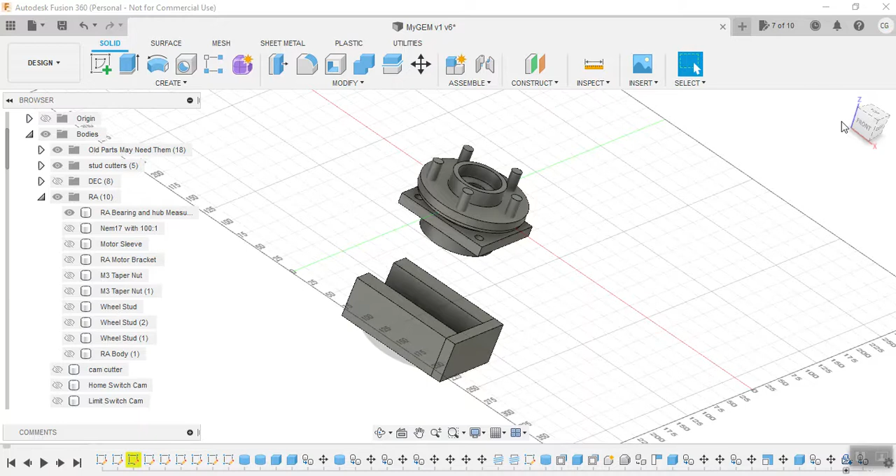Hello, I wanted to walk through the design that I've been working on. I had the first kind of teaser video out, and I thought I'd walk through some of the parts and the thinking I was going through.

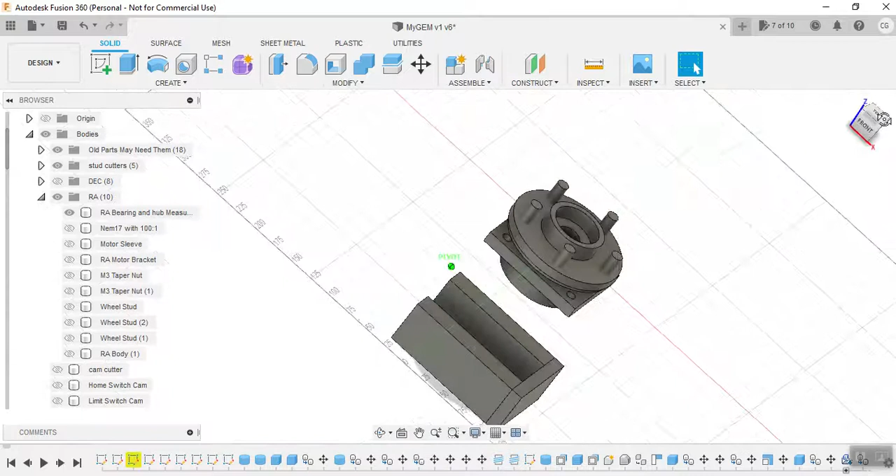This is the basic wheel hub. I listed the part number and the automobile that it went to, but it was nice because it had the wheel studs and it also had threaded holes in the back to mount threaded rods to. So on each axis or point of rotation, I had a mounting point. So this is it measured and just rough. I just made it out of shapes and such.

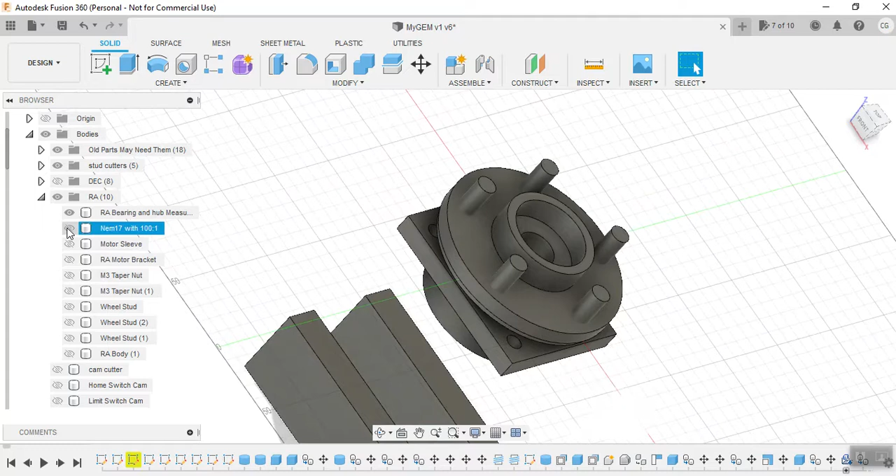So let's throw a stepper motor on it. I decided to go with a NEMA 17 with a 100-to-1 gearbox on it. I calculated the spacing from center to center, and I went with GT3 belts. I did not go with GT2. I thought GT3 was going to be much beefier, I guess. The teeth are much bigger, so I thought chances of this actually succeeding would increase by going with GT3.

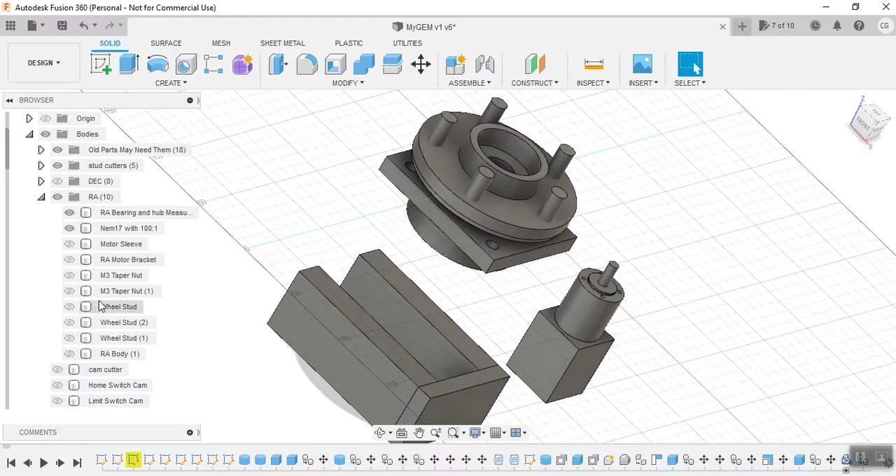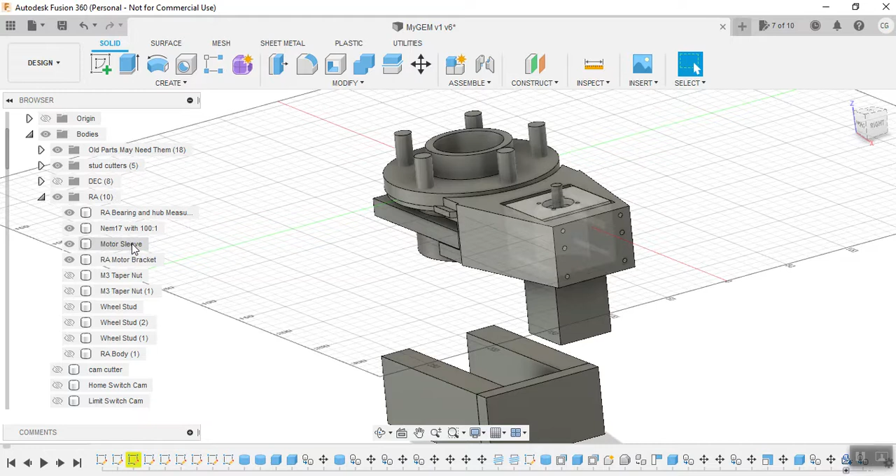Let's see. This is the actual bracket that I designed, and then the motor sleeve is what the motor goes into. So what this does, you'll see this motor sleeve is able to slide back and forth inside this void. I have M3 metal shafts running through it to keep it square, and then M3 bolts to move this, what I call motor sleeve, with the motor in it back and forth.

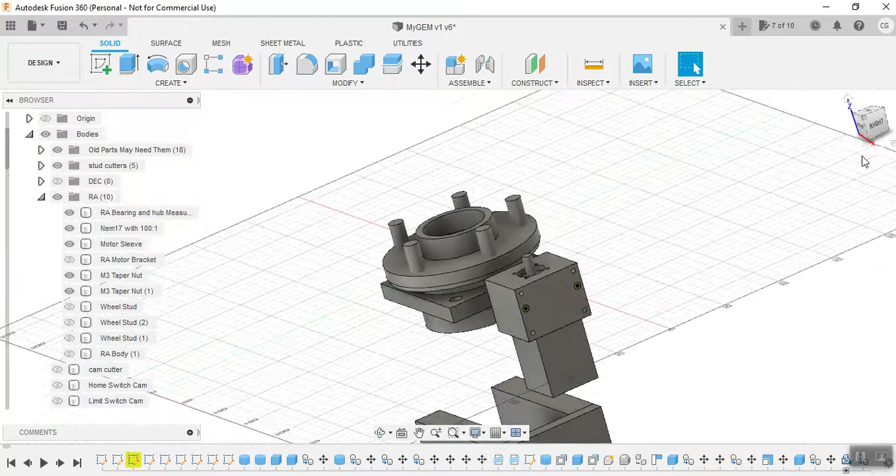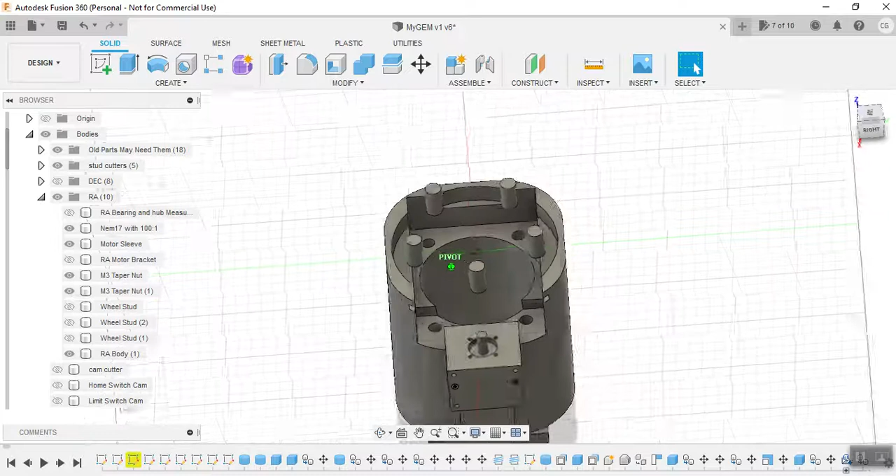Let's see if we turn off the bracket. I am using heat set threaded nuts that the M3 screws will go into, and then obviously the M3 rods, they just slide back and forth to keep things square. So let's go ahead and turn off the bracket. We'll turn on the body. I designed the body up and around the bearing. So you can see inside where I've left areas to where the bearing is going to fit in there.

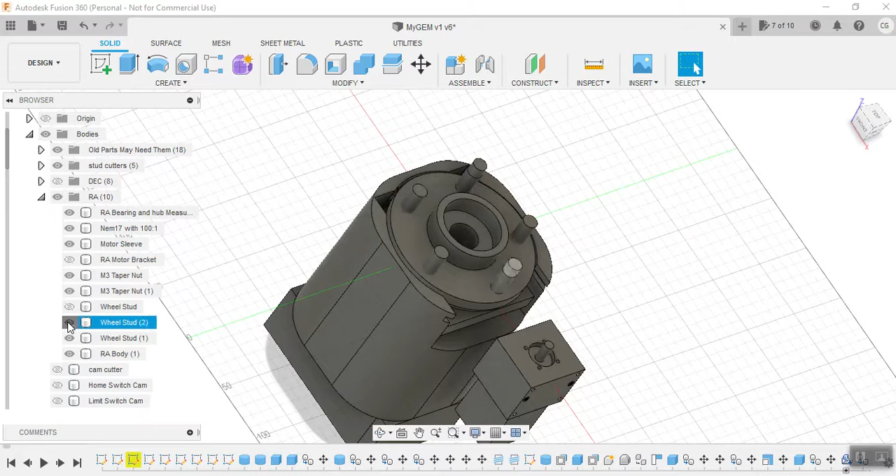Those are the wheel studs, and I'm just modeling around 3 of them for right now, or at least designing around 3. I probably will do all 5 wheel studs on this, which is what I consider the right ascension axis. So we can leave those on actually, why don't we? So this is the body that I designed out in Fusion 360. It will be 3D printed.

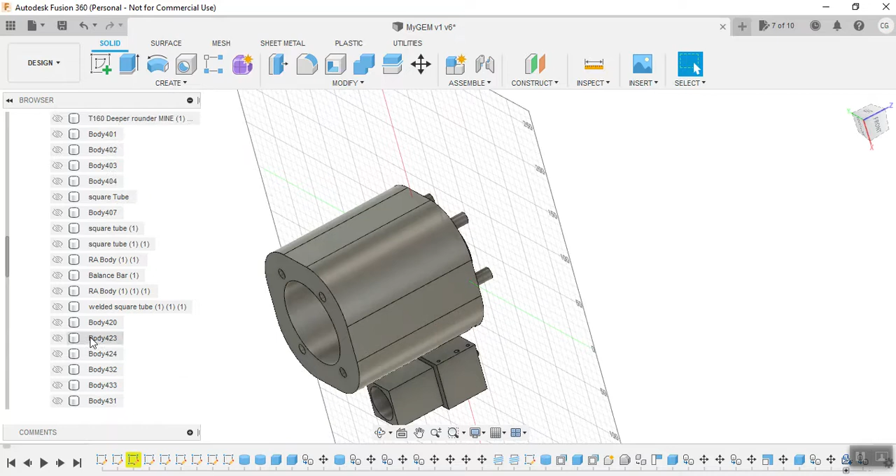And the threaded rods are going to come through the 3D printed body like this. So the threaded rods go up into, if we turn off the RA body, up into the base of the bearing and come down. So we'll turn the RA body back on.

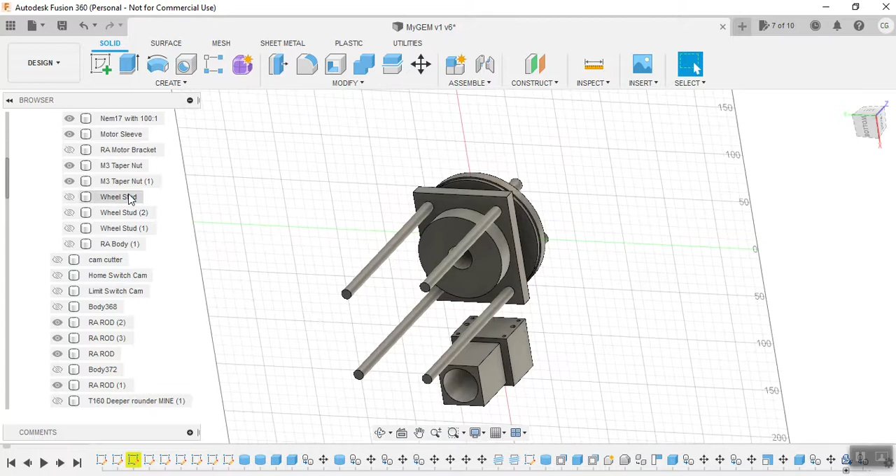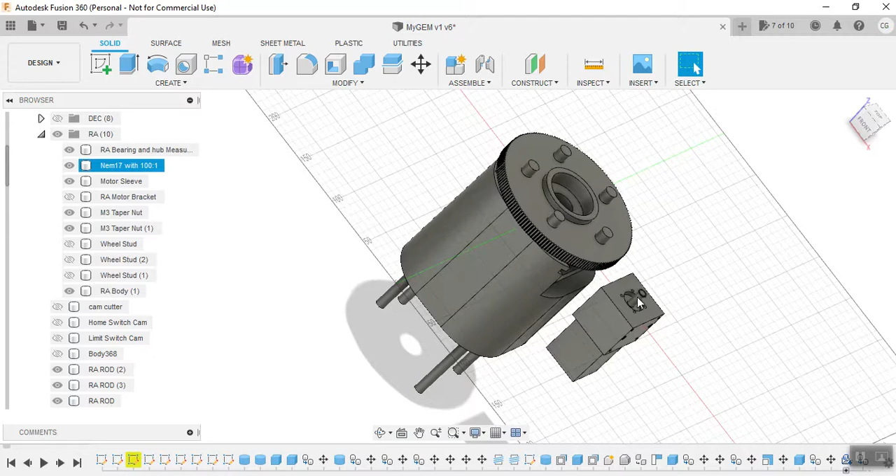Now here's where things get, well, let's go ahead and show gears. This is the GT3 gear that I designed that is 3D printed. And then I have a 16-tooth, I'm not sure if I have that in here or not. But anyways, there's a GT3 16-tooth gear that I purchased on the motor. So let's go ahead and turn the motor bracket on. So everything is turned on now as far as the right ascension axis.

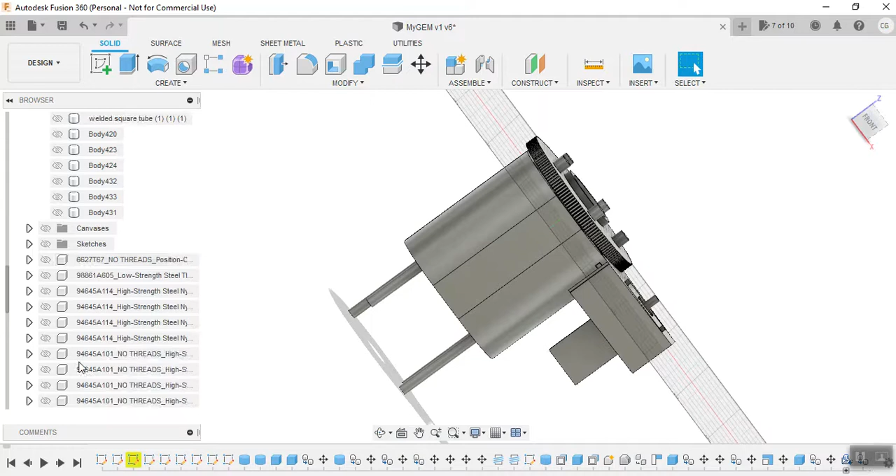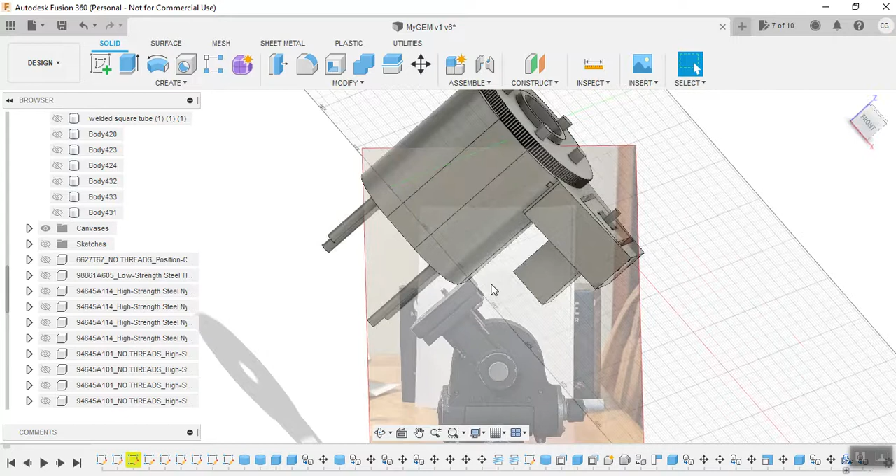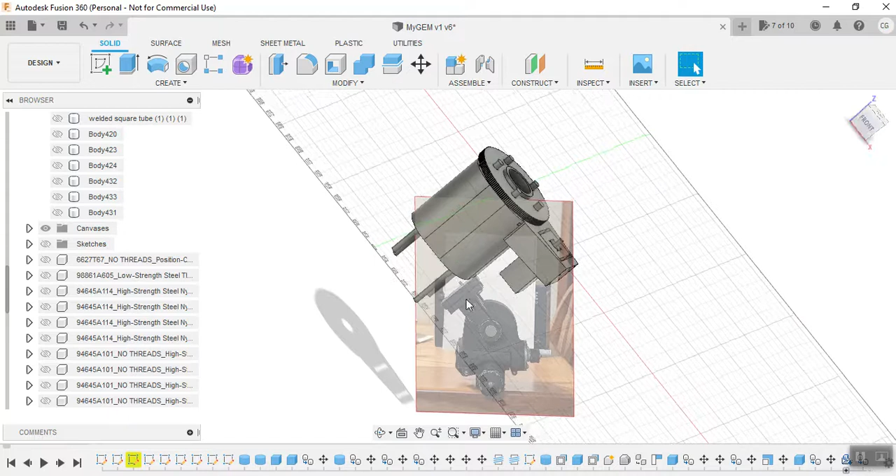Now here's what I found. You know, right ascension is going to be like this. So what I found was this majestic geared head used for photography, and it's pretty beefy. It's about the only thing I would trust, because right now the way I've weighed it, this whole assembly, once I'm done with this, when I show you the final video, is at 17 pounds. So the weight is starting to climb. And so having a heavy duty base for this telescope is going to be very, very important.

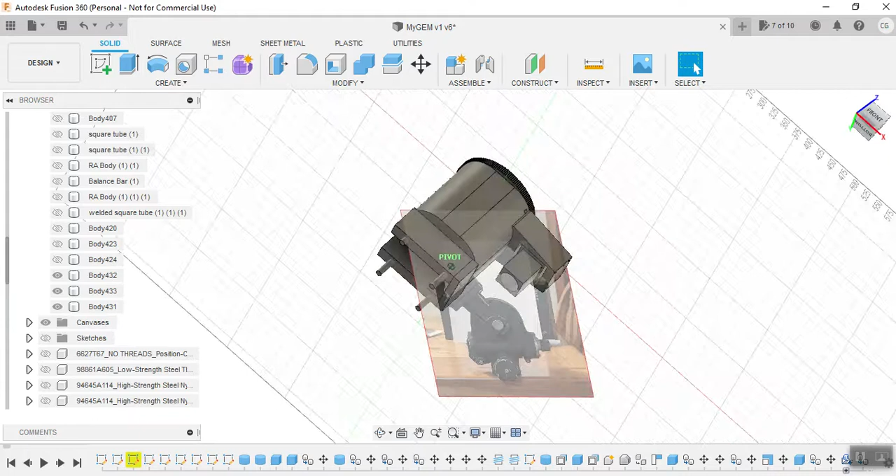So how do I attach it to this base? Well, what I decided is plastic 3D print is not going to cut it, so we need to throw some more metal at it. And so what I did is a bottom, a side, and this is modeled in approximately 1.5 inches by 1 inch mild steel square hollow tubing that I found.

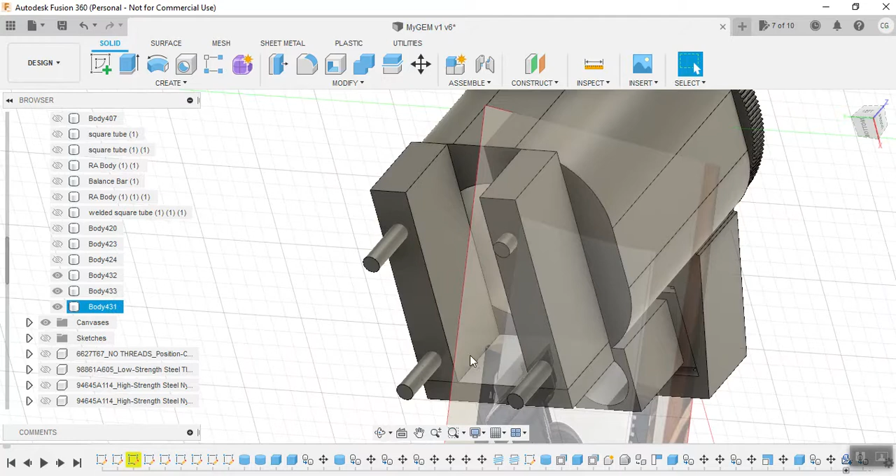So I bought some of that, and I have a welder, and I dabble a little bit. You will see I'm not very good at welding, but I can make metal stick together. I will be revamping some of this. Now, this is not what I actually designed.

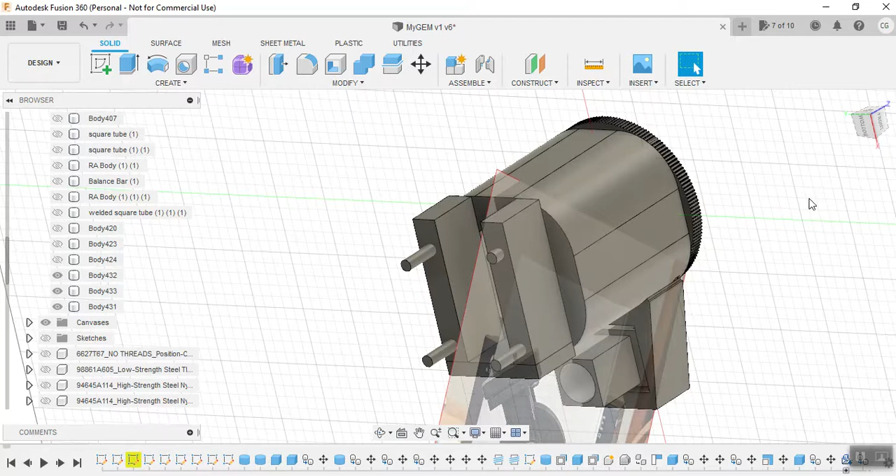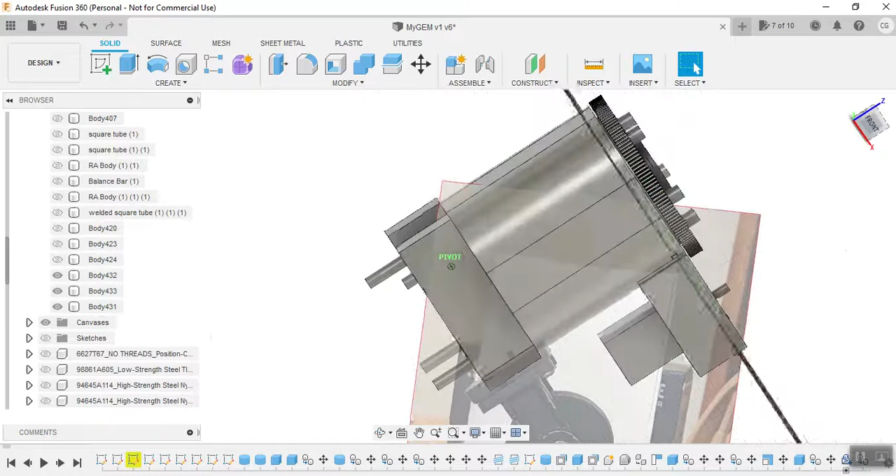Once I got a hold of the actual metal, it's hollow square tube with about 1/8 of an inch thickness of material. Once I got the actual steel in my hand, I decided I was going to go with 1 inch by 1 inch, 1/8 of an inch thickness square tubing. So in the video that I show of the final product, you'll see that's what this design evolved into. So I need to update my 3D model.

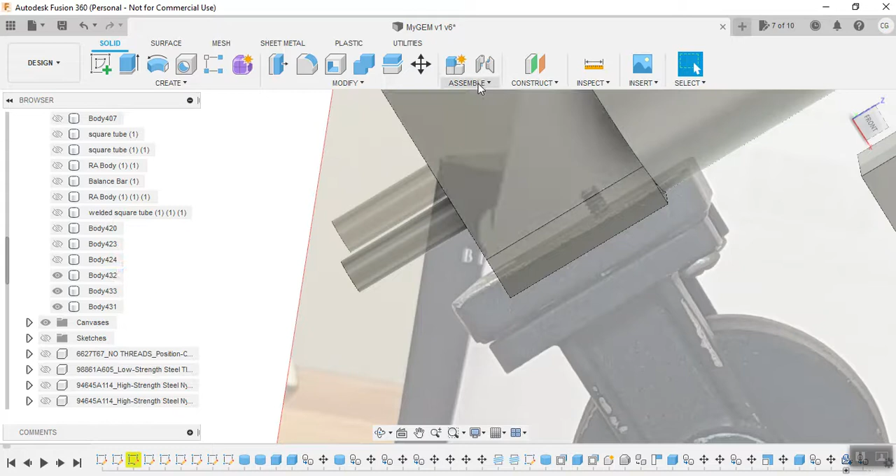So that was how I was going to attach. I made a plate that replaces this plate here on the tripod head, and I welded that plate to the 1 inch by 1 inch steel tubing. So that is how it is attaching to this tripod head. And obviously on this threaded rod we're using nuts and lock washers. Okay, so

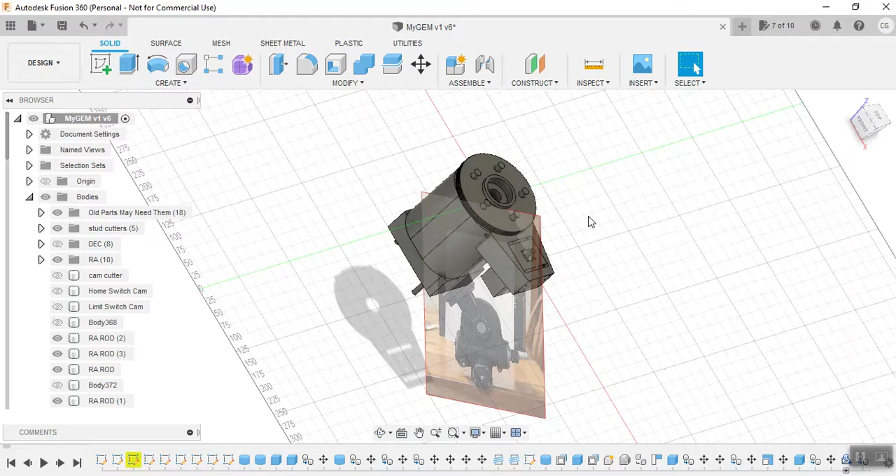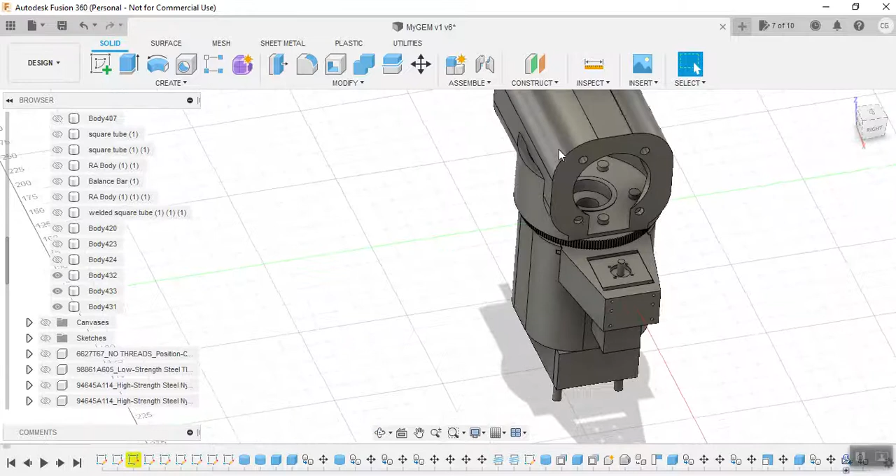I will show real quick Declination, and this is super rough. Declination, I just modeled it out. Right now, right ascension, I'm pretty happy with what I have so far. So Declination, let's turn off, it kind of gets in the way, we'll turn off that tripod head. You can see what I kind of did is I started with a cylinder to attach to, or fasten to, the wheel bearing. And then I copied up some of the same bodies from right ascension up to Declination.

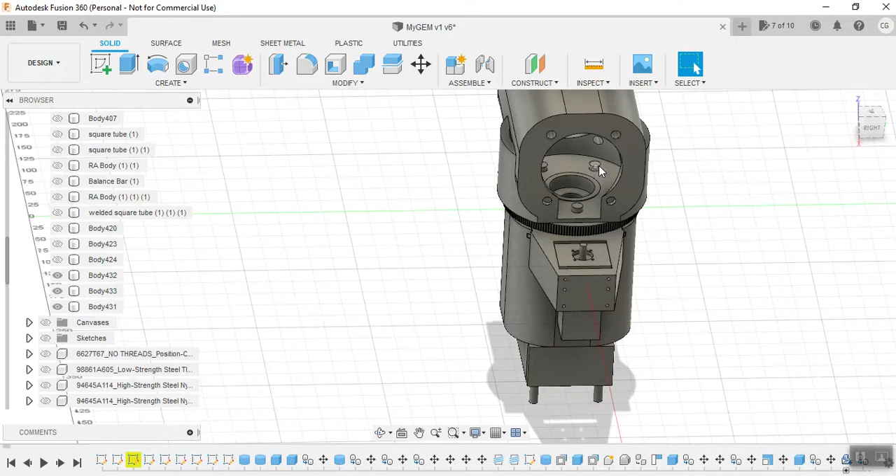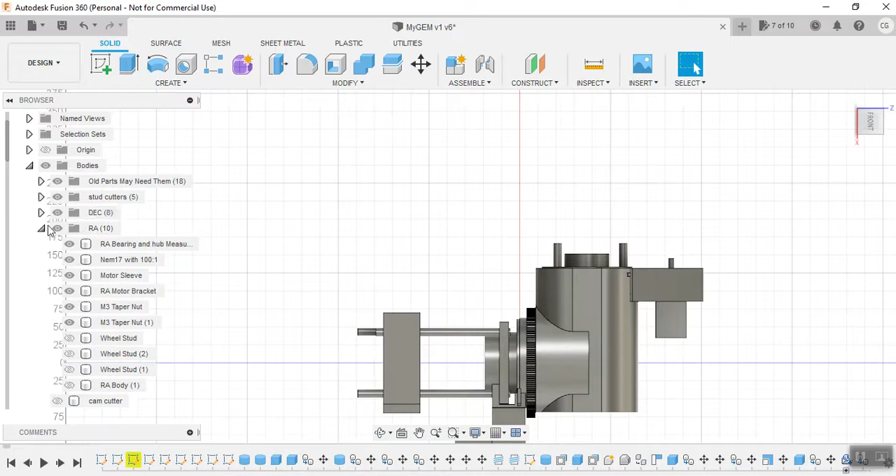Now, this is still rough. I still need to get an idea of strength here. I'm going to have more metal in here. 3D printed parts are not going to cut it. A lot of these 3D printed parts are there to surround the metal and keep it square and keep it straight. If we take out the body, and let's see, Declination will take out the body.

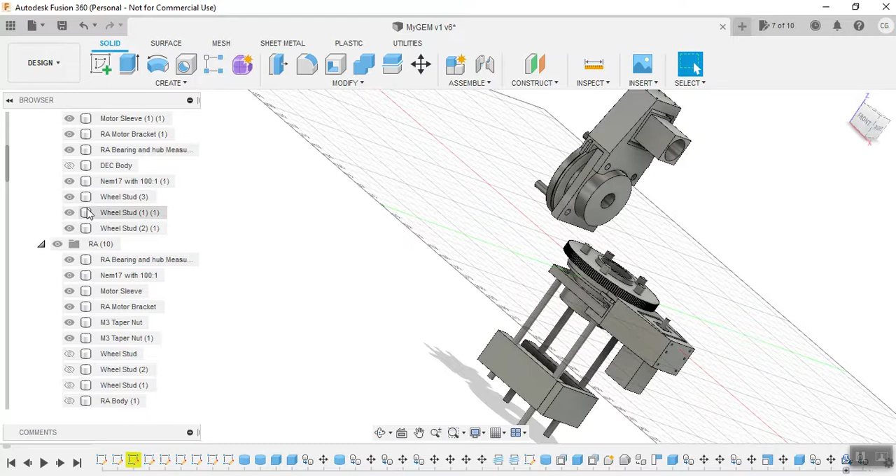Oh, I don't have any threaded rod in here. But you can see wheel bearing. I thought I had threaded rod, but maybe I've lost it, I need to get more organized. So wheel bearing, threaded rod through, and then wheel bearing, threaded rod, welded steel. The 3D printing is going to essentially wrap a lot of this and keep a lot of this threaded rod and steel aligned.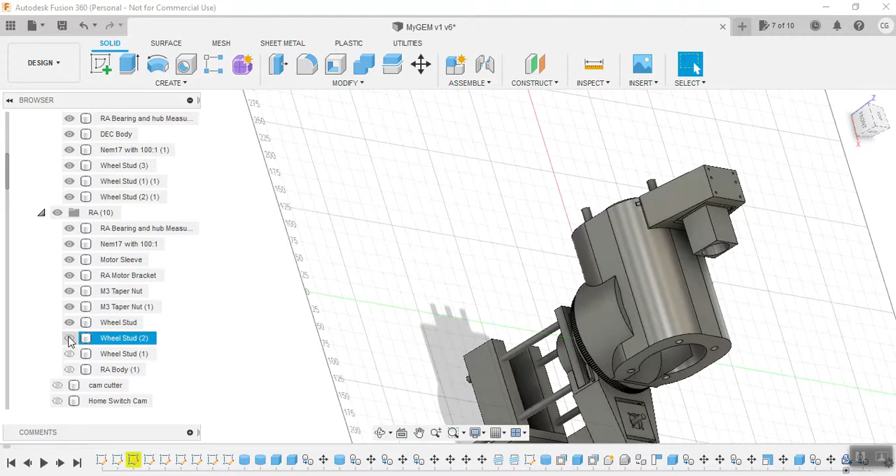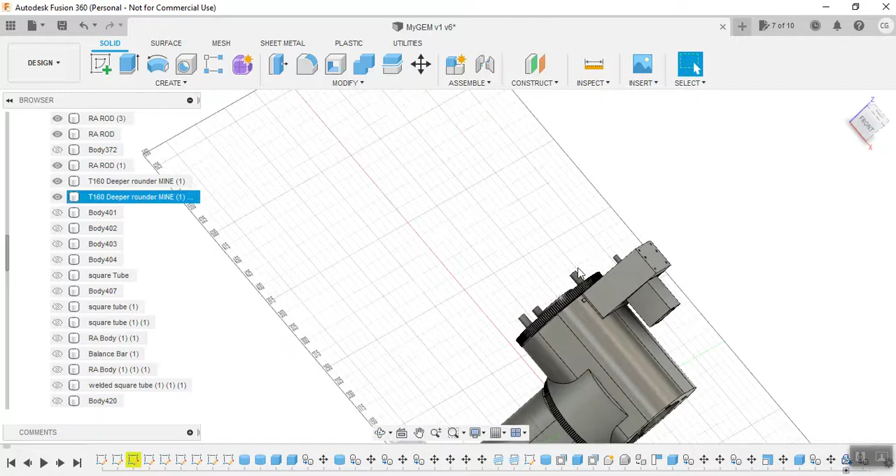And now Declination is going to be the same kind of idea. Let's see, not wheel stud. We want to put the RA body back on. And we can turn on the GT3 gear for declination. So that is kind of what I'm roughly aiming for. We'll have declination rotating around this bearing. We'll have the actual telescope rotating around this bearing.

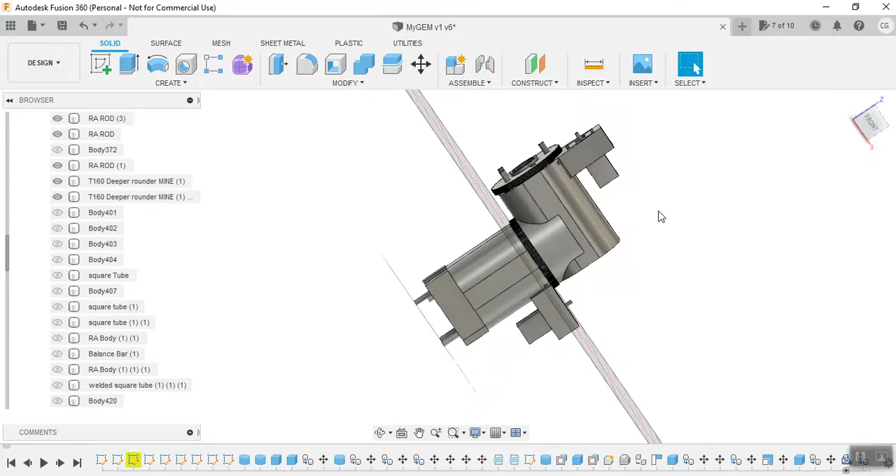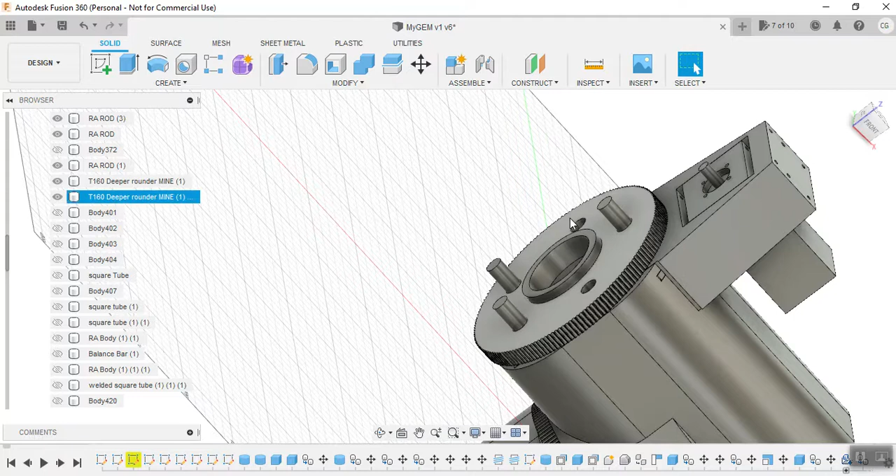Now this is still up in the air. The type of dovetail that I'll be using, I do not know. I most likely will buy one from ADM, that makes rings and plates and astronomy gear. They had a dovetail bracket that I liked. So most likely I will be buying an ADM dovetail plate to put the telescope on, and then I'll figure out a mounting system to actually attach the ADM dovetail to this thing.

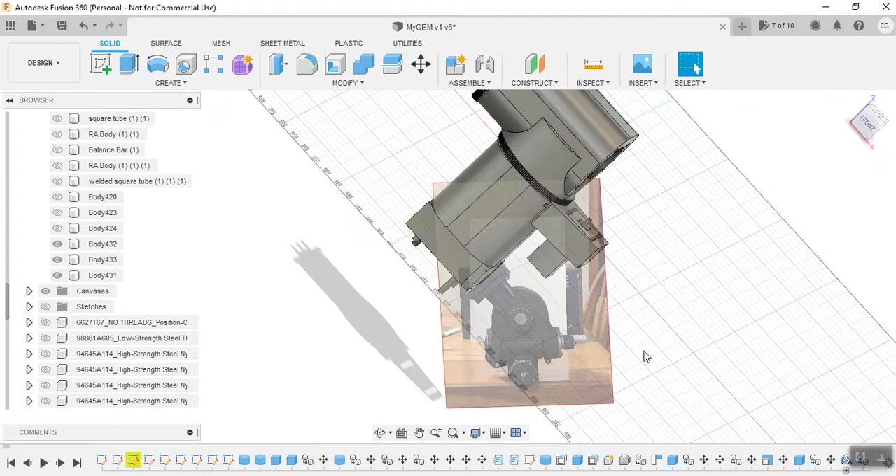So like I said, right now we are at 17 pounds, just RA. That's motor, 3D printed parts, threaded rods, steel welded assembly, and the tripod head with a geared adjustment, so I can adjust that back and forth. So let's show the video.

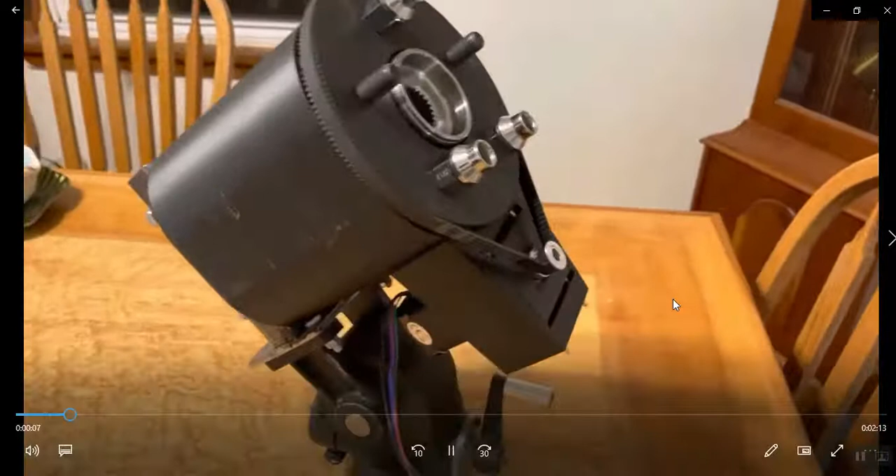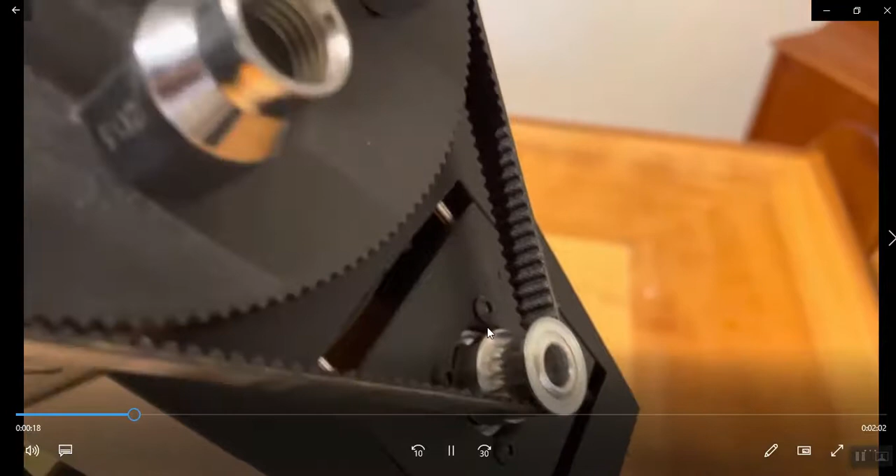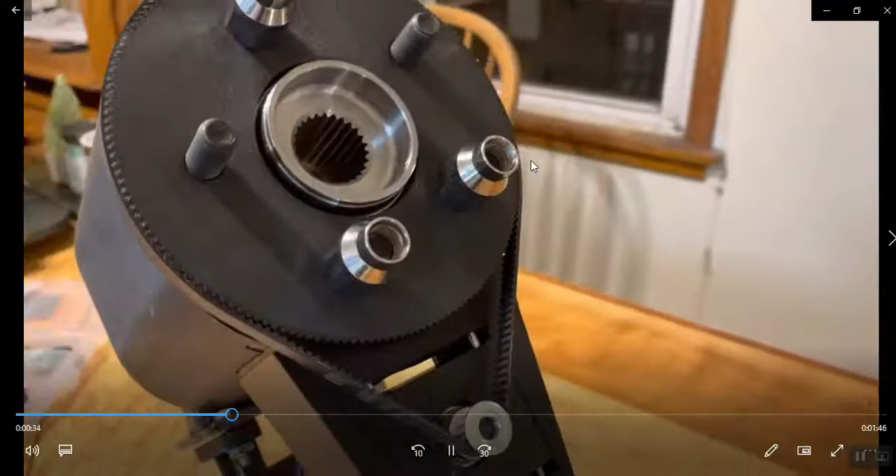Okay, so here we are. I have it set up here on the table, and I have it hooked up to a Wemos with a CNC OnStep computer. You can see the GT3 belt. You can see the motor here. It's a 100:1 gear ratio NEMA 17. And there's the wheel bearing.

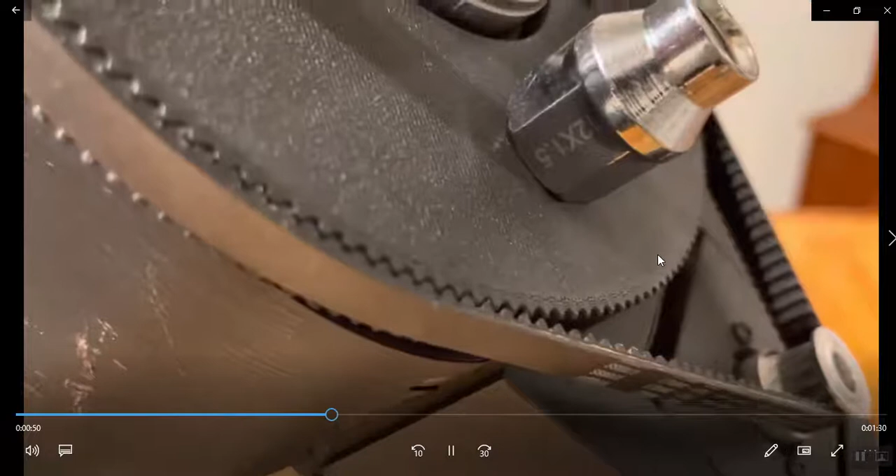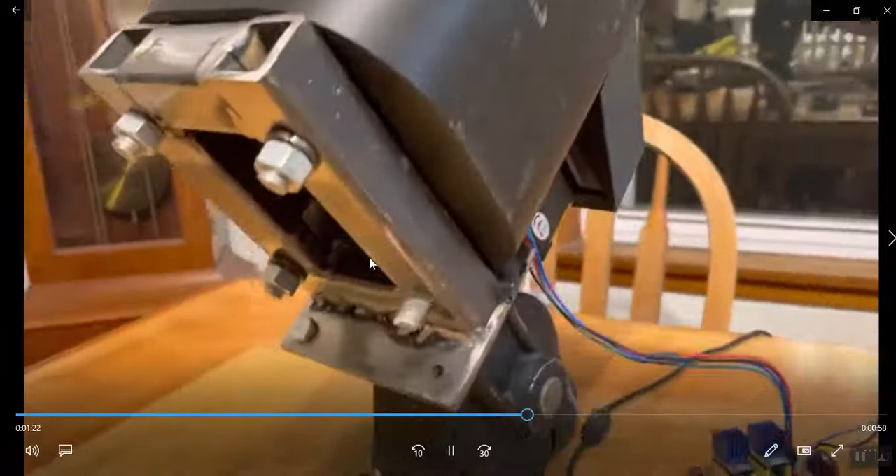So as it's rotating here, this is at maximum speed that I have it right now. I haven't really fine-tuned a lot of the OnStep settings, but I could probably increase the speed once I got into the smart web server. You can kind of see here the adjustment block that I made, that you can turn those M3 screws and nuts, and this motor slides on those 3mm rods. And then this is my welding, so don't look at my welds, they're really awful, but I probably will be redoing this. This is a rough.

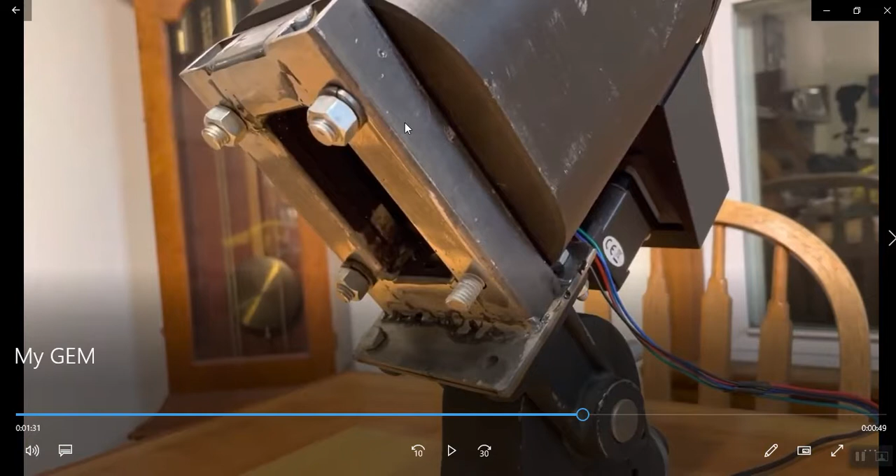You can see the 1" by 1" square steel tubing. Approximately it's 0.12 thick, almost 1/8 of an inch thick. I did a base of about 1/4 of an inch thick, and then the threaded rods with the lock nuts, I don't have it all fastened up. I wanted to see it run. So it's coming together very well. Everything's running pretty smooth. I will be looking at how this is looking, how this is running.

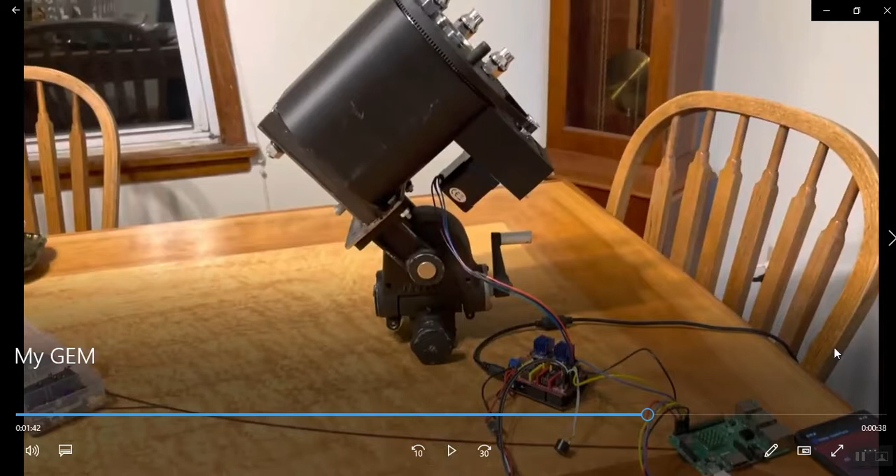Right now this is all printed in PLA, just for cost savings. The final product will be printed out of PETG, most likely. But you can see for scale, there is the Wemos with the CNC shield. So it's pretty beefy. It's pretty good size. What it will carry, I have no idea right now. This is just an experiment, and it's something to play with, and I'm having fun doing it. And so this is the current state of it. So we'll just call this, and say this is where it's at.